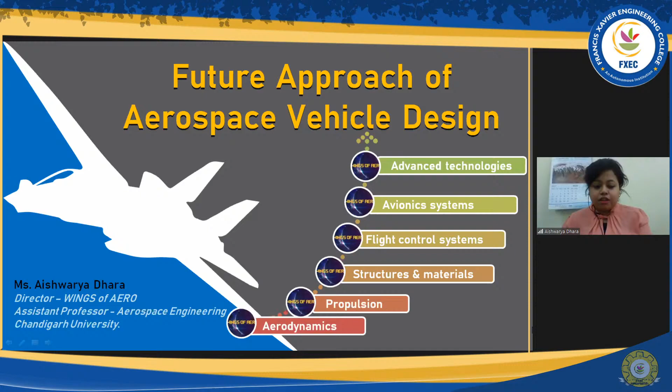Before we begin, you must know what is meant by an aerospace vehicle. It is a vehicle which has the capability to fly in air within the atmosphere and outside the atmosphere.

Aircraft can be classified into various types. First, lighter than air and heavier than air. Lighter than air includes kites, balloons, and airships. Heavier than air can be classified into two forms: with engine and without engine. Without engine, we have the glider or sailplane. With engine, it can be further classified as an airplane, rotary wing, or ornithopter.

The airplane is further classified as a land plane, which can land on land but not on water or other surfaces - this covers most fighter and passenger aircraft. An amphibian is a type of aircraft which can land either on water or on the ground. Then there's the seaplane, a special type of plane which can only land on water.

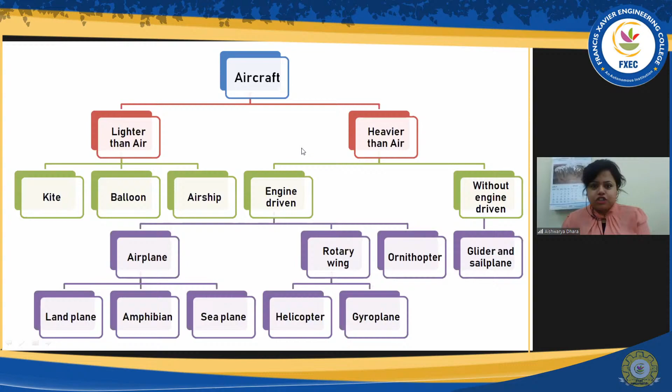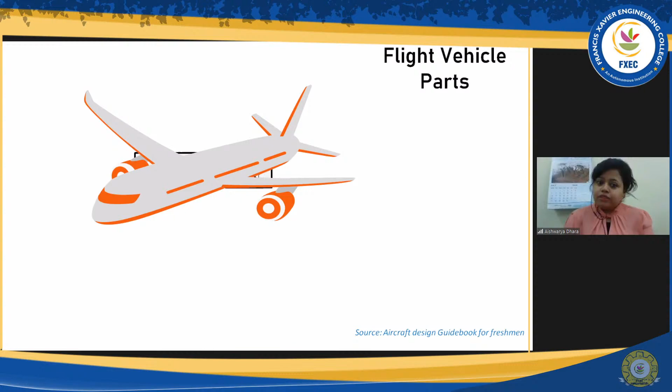Now we will see what are the flight vehicle parts. It's important, when we begin to design, to know the basic parts of an aircraft. Here is a sample aircraft in my hand. Basically, any aircraft has four basic units. First is the wing surface, which helps to produce lift.

Then comes the intake, meaning the engine. Here is the engine. What this engine does is help to propel the aircraft forward - this is the function of the engine, to produce thrust.

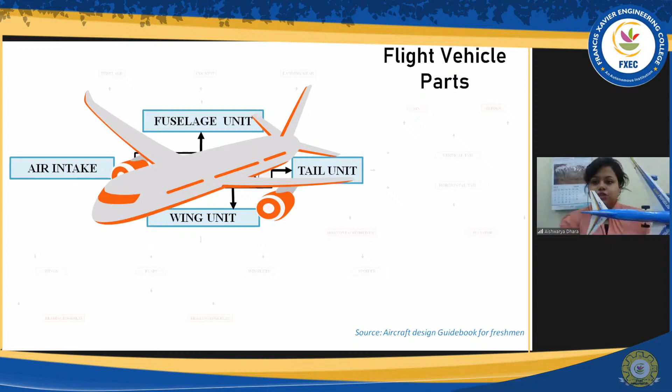Then the tail, which has two types: vertical tail and horizontal tail. This is the vertical tail, which has a control surface called the rudder. The horizontal tail also has a horizontal stabilizer and control surfaces. Using the control surface called the elevator, we can control the movements of the aircraft.

Then moving to the fuselage section - the entire body where the passengers are accommodated, where the luggage is stored, or in the case of military aircraft, where the missiles are loaded. So these are the basic units of any aircraft or space vehicle.

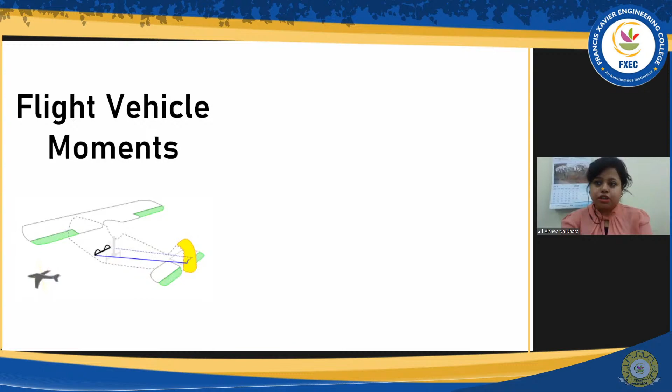Now it is important to know the basic flight movements. Until you know these, it is difficult to understand how aircraft design begins. Basically, any aircraft has three movements. First is roll, which is done by means of the aileron, located on the wing surface.

Here is a wing - we have the starboard and port wing, also called the right wing and left wing. In this wing we have the aileron. With the help of the aileron, when it deflects downward, high pressure is created which helps create high lift. On the other side, the aileron deflects upward, and due to this differential movement, it causes a rolling movement.

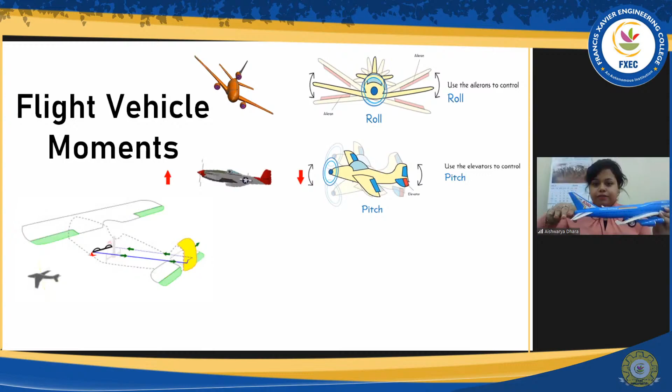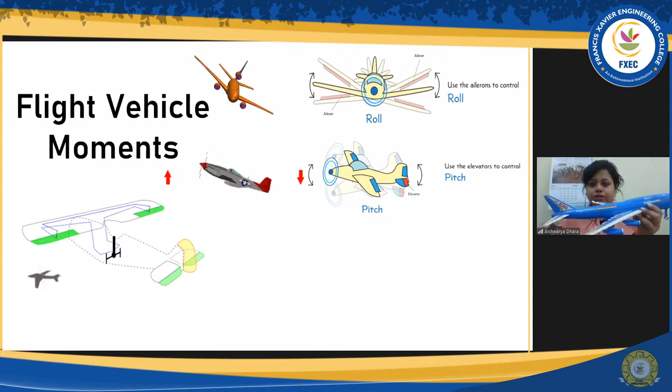Next we have the pitching movement, done by the elevator located on the horizontal tail plane. Using this tail plane, when both elevators deflect downward, the nose goes in the downward direction because lift is created there. This is how the pitching movement occurs - nose up and nose down - controlled by the elevator.

Then the last one is the yaw movement, done by the control surface called the rudder, located on the vertical stabilizer. It can move left and right.

So using the movement of this left and right direction, the nose can also move to the right and the left side, and vice versa. If the rudder is moved to the right, the nose will also move to the right. If the rudder is deflected to the left, the nose will also move to the left. So this left and right movement is called the yaw movement. So these are the basic movements of any flight: rolling, pitching and yaw.

Now we will come to today's phase, that is, what is the future of aerospace vehicle technologies now, and what will be beyond. Before that, you must know that for over 2,000 years, man wanted to fly and to move from one point to another. There have been stories of people strapping bird-like wing structures of stiffened cloth on themselves and attempting to fly from a tower. So this is how it was initially tried 2000 years back.

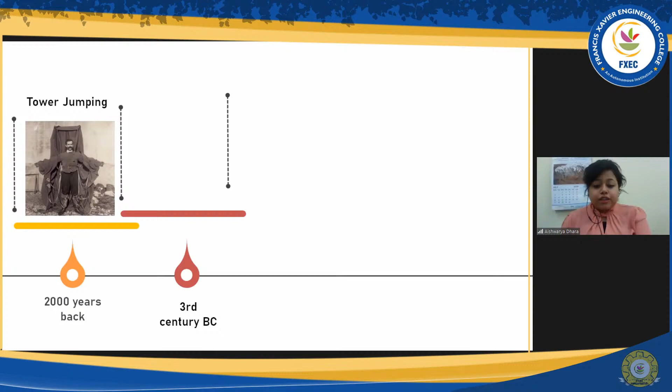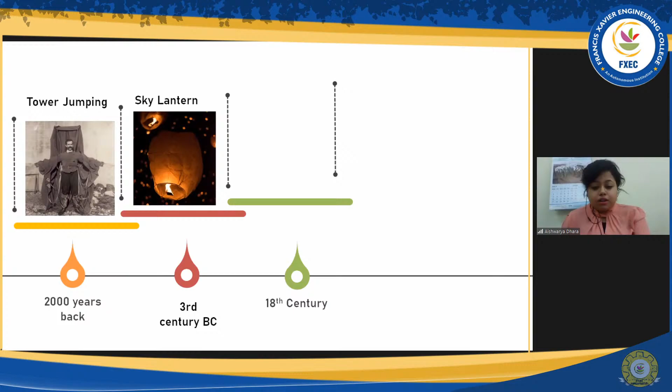Later, in some BCs, the sky lantern was developed, and the principle of the sky lantern is based on the hot air balloon. Once the air gets heated, its density becomes lighter, and as it becomes lighter, it lifts off. And back in the 3rd century, China and other people used the sky lantern to scare enemy troops. Gradually, in the 18th century, the balloon became a major rage in this evolution, and it also helped provide an understanding of the relationship between altitude and the atmosphere.

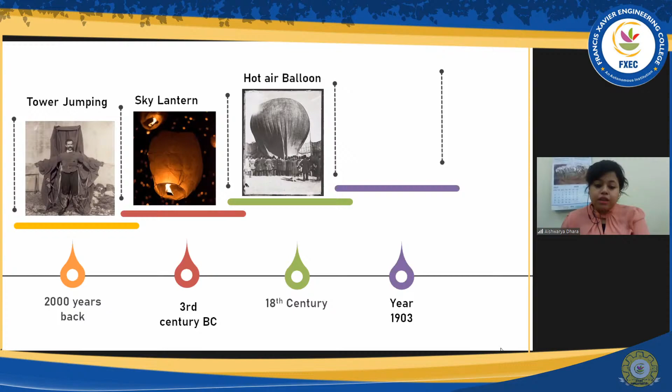Then, using the methodological approach of the controllability of the aircraft, the Wright brothers built power gliders in the year 1903. After that, over a period of time, it evolved to the cloth and wood biplane of the 1920s. As you can see in the figure, they made wing structures using wood with cloth mounted over it. Gradually this evolution kept developing, and in the 1930s the first all-metal single wing aircraft was developed.

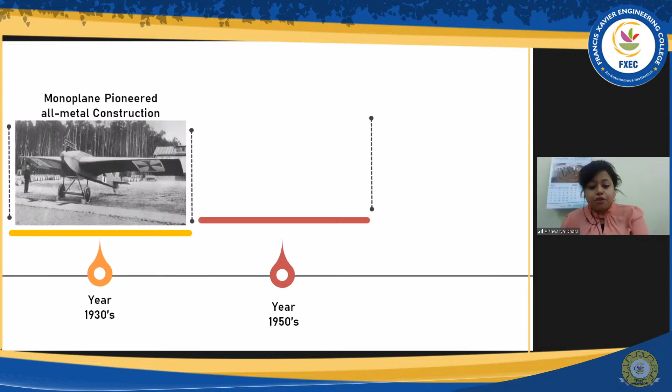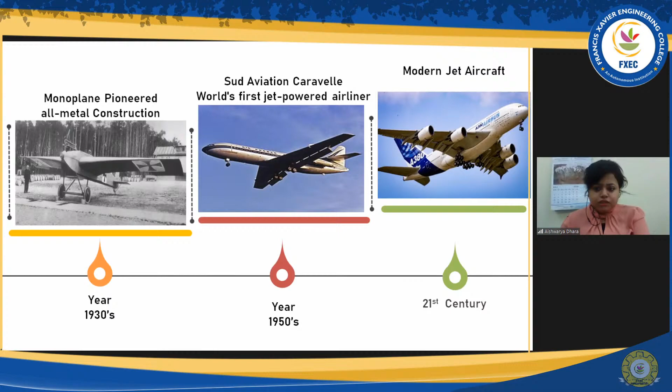From there it developed to 100-passenger transport aircraft in the 1950s, and gradually the modern jet aircraft. You can see the modern Airbus 380, a double decker, which has the capability to reach any point in the world in a single day. So this is how the aircraft of the 21st century may look, but fundamentally different further in the future.

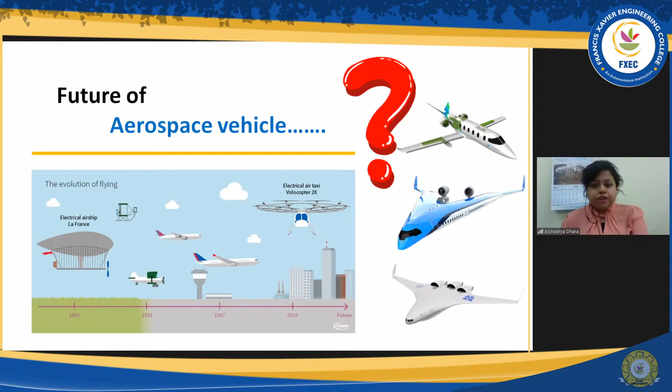All those inspirations began from watching birds. As you know, we all like to watch birds, and when we look at birds, we feel like flying in the air. So this whole concept is biomimicry, or we can say engineering in nature's style. Biomimicry is defined as the practice that learns from and mimics the strategies found in nature to solve human design challenges. Even NASA has been inspired, and they have developed the very next generation, not as a blueprint, but as a biomimetic mode.

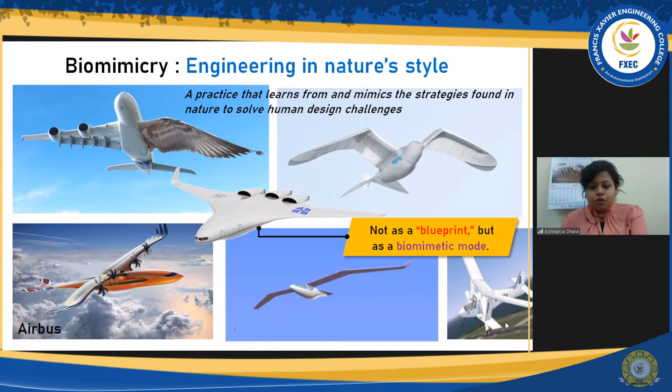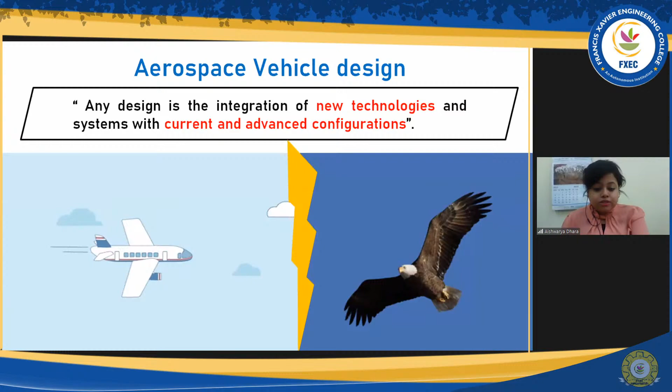As you can see, this is a blended wing body which looks similar to a bird. Even recently, news came from Airbus that they are developing a hybrid electric airliner, which aims to show the potential of biomimicry in aviation design. You can see the winglets; they look almost similar to the feathers of birds. So today our main concern is aerospace vehicle design, which states that any design is an integration of new technologies and systems with the current and advanced configuration.

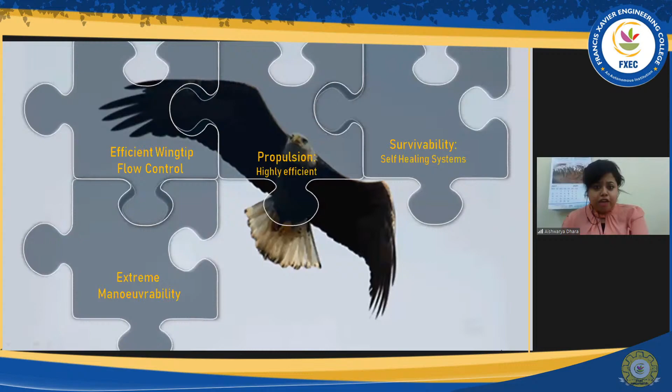Now consider our national bird. We all know our national bird is the eagle. The eagle is fully integrated with all the systems that are integrated in a real aircraft. As you can see: efficient wing tips, propulsion systems, survivability, extreme maneuvering, strong and lightweight, and even a morphing wing. The wing can be flexibly folded.

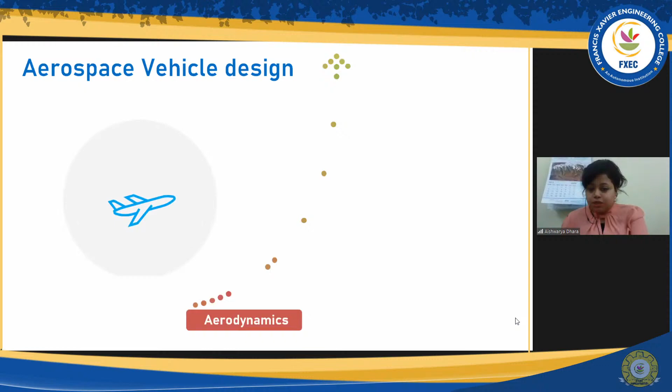So an aerospace vehicle must aim to meet all the requirements of flying within and outside the atmosphere, and must have all the following qualities. The first quality we need is aerodynamics. Next comes propulsion, then structures and materials, flight control, avionics systems, and of course we need to develop some advanced technologies.

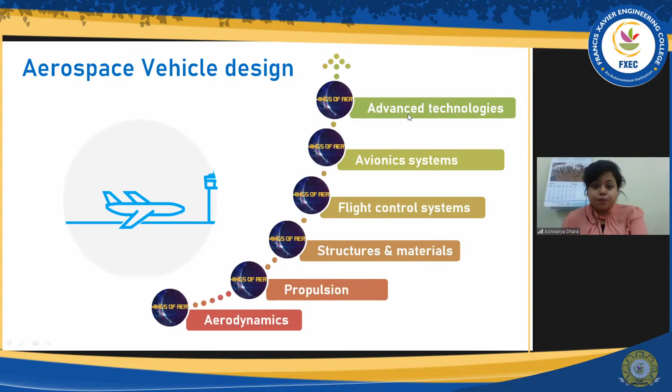Now we will look at each one, one by one, very deeply: how each change in aerodynamics, propulsion, structure and materials, flight control system, avionics systems, and including advanced technologies can improve the aerospace vehicle design. Now, before beginning any design, one must understand the following criteria, the following elements.

First, what is the customer requirement, or what is the present demand? That is very important to understand. Without understanding the demand, without understanding the present requirement, we cannot step forward to any design. After that, in aerodynamics, the important factor comes as size and aesthetic. Size means in aircraft we cannot make a very bulky thing. We must optimize the size and the shape, how it will look, maybe a design of a fuselage or the wing structure, engine locations, and many more. More detail will come in the upcoming slides.

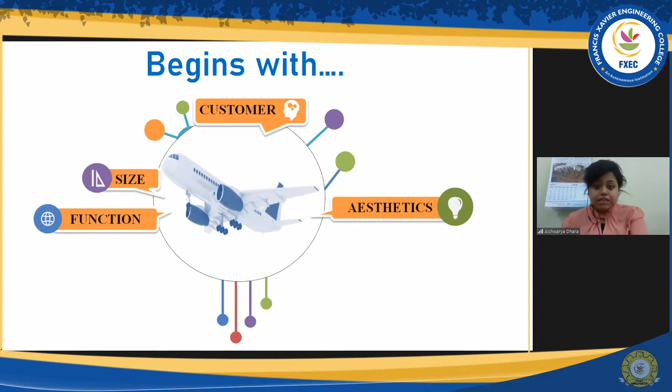Then comes the functionality. Whatever we are using, we must think about the function, whether it is useful to bring into the design, or we must avoid it, or what are the weight factors, because weight is one of the prime concerns in aerospace vehicle design. Then comes manufacture and safety. Manufacture and safety is another prime concern: we must see which methodology we are following to manufacture the aircraft, whether it is readily available in the market or not accessible in the market. So if I need to manufacture it separately, whether the cost will increase or not,

this is also one of the biggest concerns. So when we begin to design any aircraft, it is very important that one must know these qualities and justify them before beginning to design. First comes the requirement, and then the other qualities: size, aesthetic, function, manufacturing, safety. When we talk about the passengers, safety is another big concern. Then of course the cost. We must reduce the cost of the aircraft. So these are the factors. Now we will see how all these factors create a huge impact on the aerospace vehicle: aerodynamics, propulsion, structures, flight control systems, and advanced technologies.

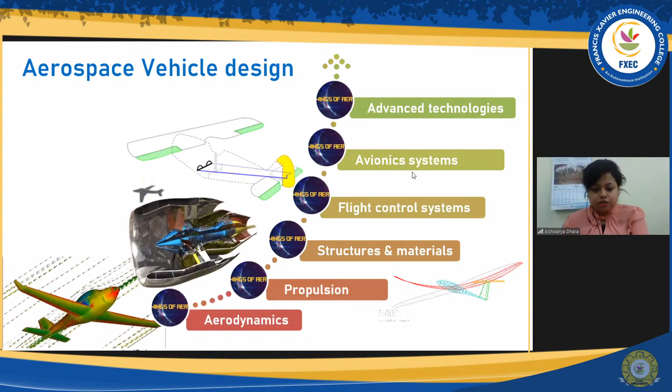First we will start with aerodynamics. What is aerodynamics? Aerodynamics is the study of flow over an aircraft. Here we want to reduce the drag of the aircraft, because by reducing the drag we attain better fuel economy. As you can see, when the flow moves over the bird, it causes a streamlined pattern. So we must remember, when we design an aircraft, it must have a streamlined pattern. That is one important factor.

The second factor is a smooth surface. By creating a smooth surface, we can avoid creating air resistance to the flow over the surface. So we must have a very smooth surface. These two are the main criteria. The streamlined pattern we can technically call an airfoil shape. As you can see in the bird, when we define the structure, it comes out as an airfoil shape.

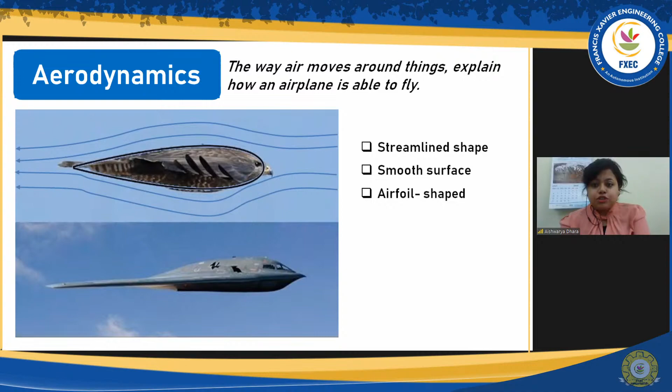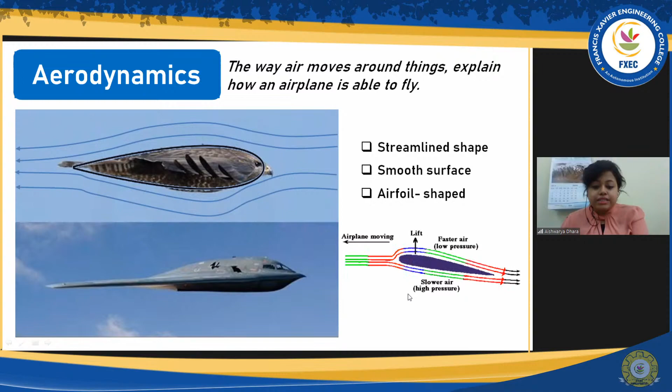As we increase the angle of attack of this airfoil, what happens? The bottom part of the airfoil creates high pressure, and on the top we have low pressure. To bring equilibrium, the flow tries to move from high pressure to low pressure, so naturally it pushes the object up. Due to this, it creates lift. This is how the concept of biomimicry has evolved to inspire the aircraft's wing structure. When birds want to take off or land, they raise their wing. The same concept has been used in the aircraft wing system.

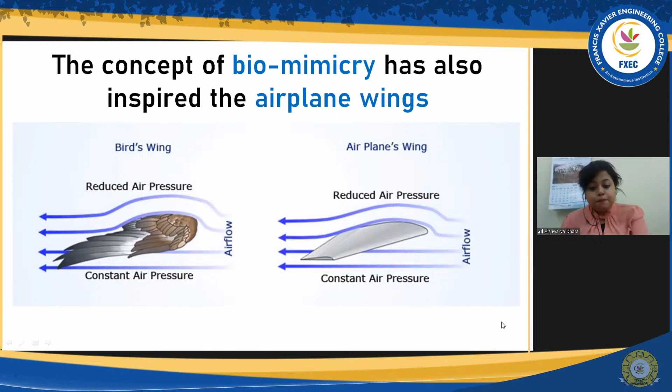Now, before you start designing the wing, you must know what the flight speed is. The flight speed can be defined in aeronautics by means of Mach number. Mach number is the speed of the object divided by the speed of sound. Here, the speed of the object means the speed of the flight vehicle, the aircraft, and the speed of sound is generally 340 meters per second. So this is how we define the Mach number.

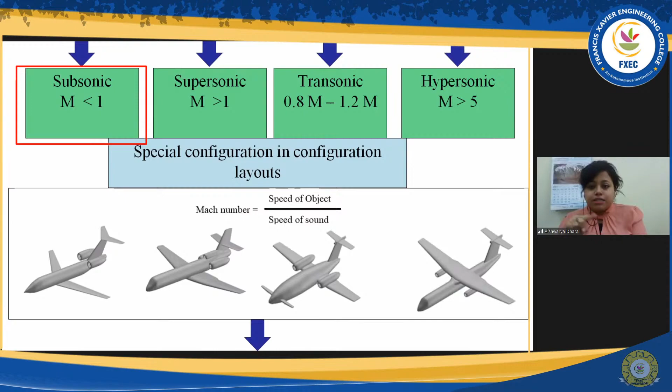So based on your aerodynamic performance and aerodynamic optimization, you must come to a conclusion which design will be beneficial, keeping in mind the shape, size, function, manufacturing, safety, and also the cost. All these constraints must be satisfied. This optimization can be further done. For example, there is much difference when you design subsonic and supersonic. What is the difference? Subsonic, the Mach number is less than 1; supersonic, it is greater than 1.

When the air is flowing over the subsonic aircraft, meaning the Mach number is less than 1, it is moving smoothly. But once we are designing any aircraft which flies at supersonic speed, we have a conical shape. Why a conical shape? Because if we use a blunt surface like this subsonic aircraft, it will create a bow shock wave.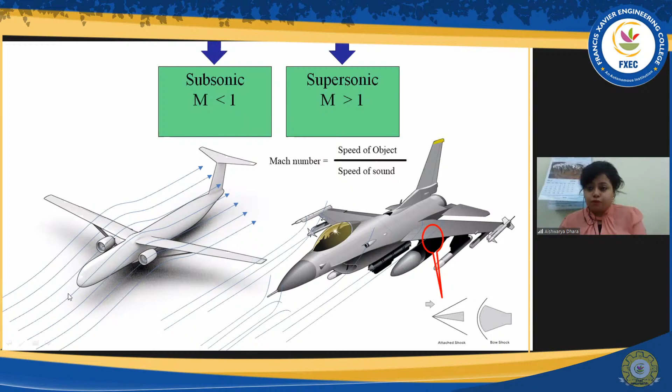So keeping all these constraints in mind, when we are designing for a supersonic aircraft or supersonic speed vehicles, we must have a sharp leading edge. And also when the flow moves along it, it creates an attached shock wave. So these are the constraints; we must clearly remember the concepts before we develop any aircraft.

Now moving to the next, we are having many different types. You can see the MiG is one of the fighter aircraft, which is also supersonic. You can see the sharp leading edge. This is a cargo aircraft which helps for transportation of large vehicles. You can see the configuration is different. This is a high wing configuration.

Then again, moving to the large passenger aircraft, that is a Boeing 787. You can see again their configurations vary, because each of these aircraft has different configurations, different requirements, different purposes, and also different speed ranges. So based on your speed range, the factors also change.

Then here is another amazing aircraft which NASA has tested, the Boeing 747, which has the capability to carry a space shuttle. So when this aircraft reaches an altitude of 15 kilometers, near the tropopause of the atmosphere, the space shuttle can take off from it, and due to that, a lot of fuel can be saved.

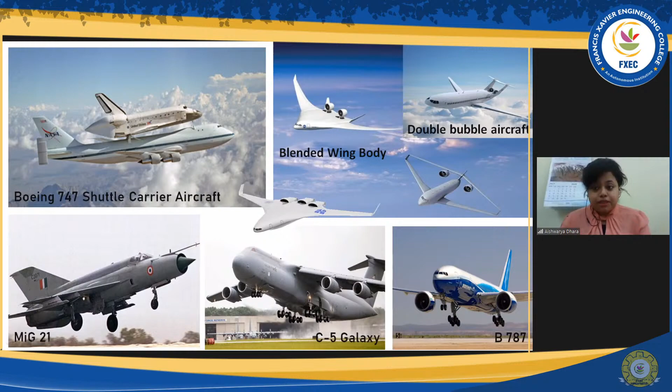So many things are happening, and there are some future vehicles upcoming. NASA and others have tested blended wing bodies, you can see. Then this is the double bubble. These are the upcoming generation. It has been said by NASA, in the upcoming predictions, that the upcoming generation will have such kinds of aircraft. This will be obsolete, and the blended body will see around 50 percent growth in the 2050s.

Now we will see how to do optimization. Before we go for the optimization, when you go for design, there are two ways. One is measures of effectiveness and one is measures of performance. When we talk about measures of effectiveness, we have to keep in mind the customer's point of view. And when we talk about measures of performance, we need to know the engineer's point of view. Now, how do these two factors vary?

Let's see. When we talk about the customer's point of view, you must know the amount of payload. Payload means the number of passengers traveling in the aircraft, how much weight it will be carrying, like for the cargo aircraft, or for missiles, what kind of fighter aircraft it will be and how many missiles it will carry. So all those factors are one constraint, the payload weight.

Then speed, as I've said, speed is one of the important criteria from the customer's or demand point of view. Then aesthetics, how the aircraft will look. Of course the look and appearance is one of the major concerns in the industry. Then technology, what advanced technologies will be applicable; this is the customer's point of view.

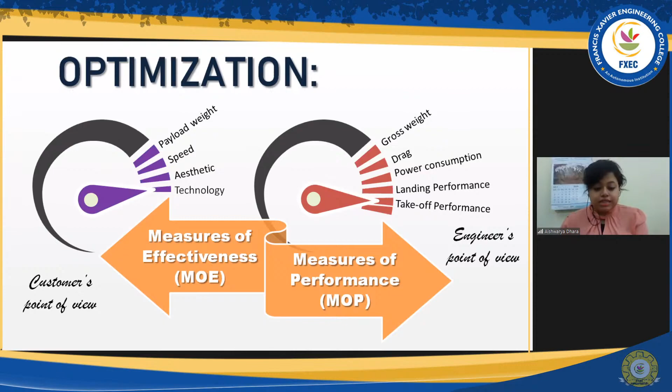So this is how you need to create an aerodynamic shaping, and aerodynamic shaping is one of the most important factors in designing any aircraft. Now many people keep asking whether the blended wing body will be the future. Yes, of course it will be the upcoming future. About 50% of aircraft will be of the blended body type. Now how? There is a wonderful story behind this blended body.

Do you know this blended body concept was started in the 1920s, developed by Nicolas Woyevodsky. The scientist Nicolas Woyevodsky developed and tested it, but finally, during the test, he had an accident, so that was gone. Then later, in the 1940s, another scientist from another industry, the Miles M.26, developed this project. But after testing and developing, they didn't find much difference in this design. So again, it became obsolete.

Then NASA took it over in the 1990s. Gradually they kept doing research, and they developed a small prototype unmanned air vehicle, the Boeing X-48, and the payload and everything was designed in such a way that around 450 to 800 passengers can be accommodated in that particular aircraft. You can imagine this is a very huge amount at a time. They also found that, compared with the conventional one, around 20 percent fuel savings are achieved. So this is a wonderful concept.

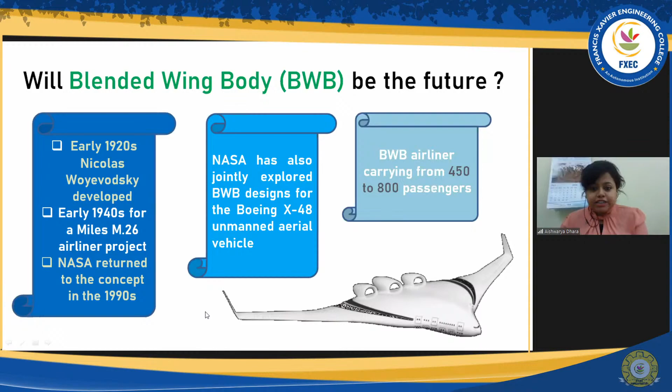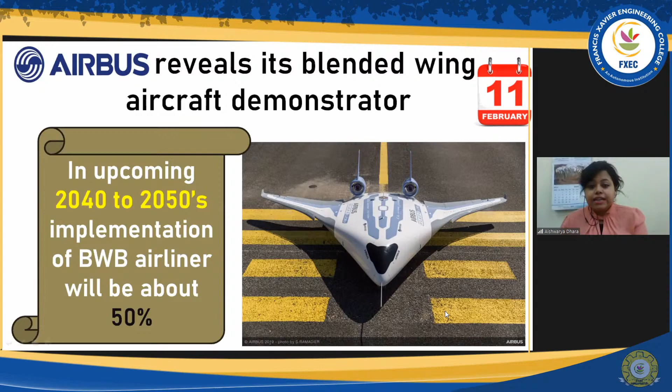As you can see, it is almost like a bird-like structure. And even recently the news came from Airbus on 11th February that they have fundamentally demonstrated this blended body concept, and they have also declared that in the upcoming 2040s to 2050s, blended wing body airliners will be implemented at about 50 percent. They have said that clearly.

Not only this blended body, there is a lot of research going on, such as the double bubble design, and also this V-shaped wing you can see. Then again, strut-braced wings are used, and the blended body. These are the upcoming futures of the aircraft.

Now, when an aircraft is flying at some altitude, it must undergo some kind of loading on the structure, such as air loading, inertial loading, loading due to the power plant, meaning the engine, loading due to landing, takeoff, taxiing, towing, jacking, or maybe even bird strike. So these are the loadings an aircraft can undergo. Based on that, it is very important for a designer to design the structure. So based on research, researchers modified the structural design of the aircraft for these applications.

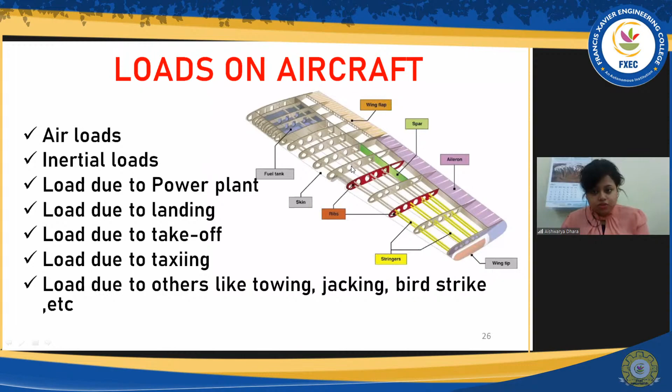So, as we know, when we talk about the structure of the aircraft, it consists of ribs. You can see the ribs, which give the defined shape of an airfoil in every section. Then we have the stringers, which attach longitudinally from the root to the tip. Then we have spars, mostly of I shape or T shape. You can see here, these are the spars. All those give the support and rigidity of the structure. Now these are the basic structures.

Now in advanced research, they have modified the structures based on the type of aircraft. When we talk about multi-rib wings, multi-rib means the number of ribs will be more compared with the stringers or the spars. Multi-ribs are mostly used for transport aircraft, like passenger aircraft and cargo aircraft. Multi-spar means there will be multiple spars from the root to the tip, where the number of ribs will be very less. This kind of structure is used for high speed aircraft and fighter aircraft.

The reason is that at high speeds they undergo shock waves, and a shock wave is nothing but high pressure acting on the surface or the material. So we must make the structure strong enough to resist such pressures. Then coming to the single spar wing. Single spar wings are mostly used for sailplanes or gliders. Single spar means there will be only one spar in the entire cross section of the ribs. Because this kind of sailplane doesn't undergo much load or much impact, it uses a single spar.

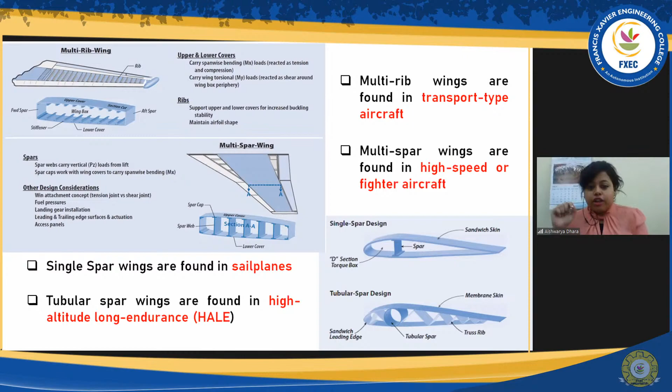An amazing design has been done as a tubular spar design. These tubular spar designs are used for high altitude long endurance aircraft. High altitude means it can go more than 15 kilometers from sea level into the atmosphere. Long endurance is a term we use in aviation, meaning how much time an aircraft is flying in the air. Long endurance means an aircraft can fly more than 24 hours, not less. So for such aircraft, we use this tubular spar design.

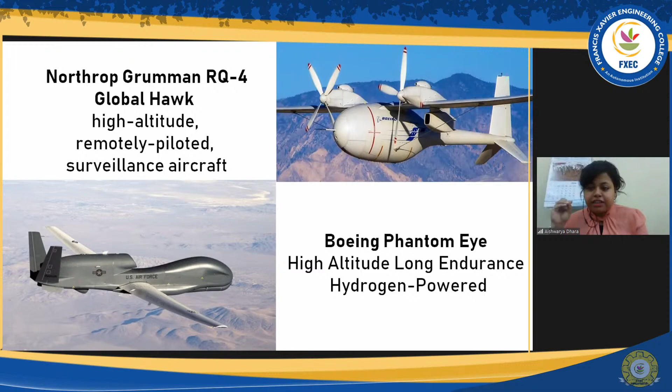So these are the types of high altitude long endurance aircraft. Mostly we use UAVs, the very commonly known Global Hawk and the Boeing Phantom Eye. These have wide applications for surveillance, and some are for predicting atmospheric properties and other factors.

Once we move out from these structures, another important thing human beings have aimed to discover is a new alteration of the design. This concept was developed by watching birds. When birds want to move faster, they flap their wings. The same principle has been implemented in planes, called wing morphing.

Most modern aircraft use a fixed wing, as shown in previous slides, meaning the angle cannot change. But with morphing wings, the aircraft can have multi-role capability and can sustain in the air longer, even during flight. Scientists have said that when a wing transforms, it is easy to steer in the air, and it will fly much easier than a fixed wing.

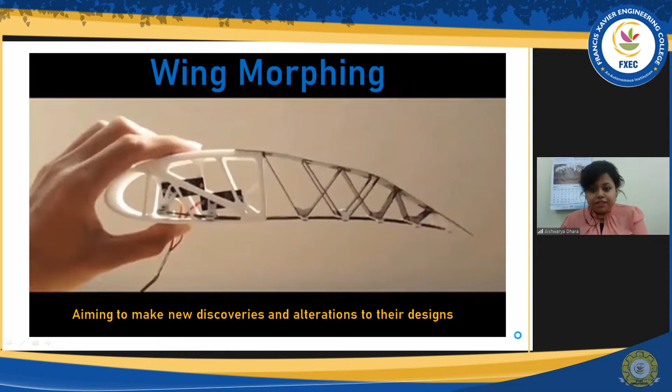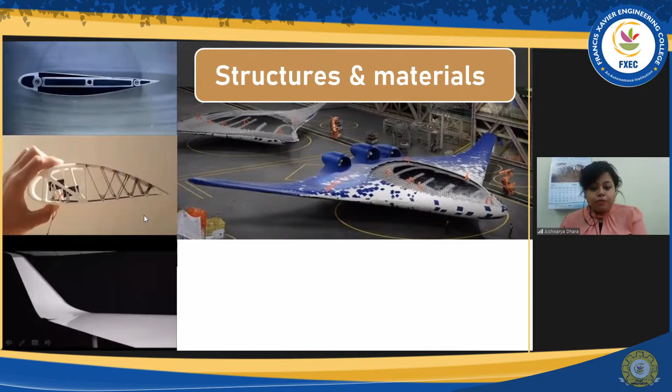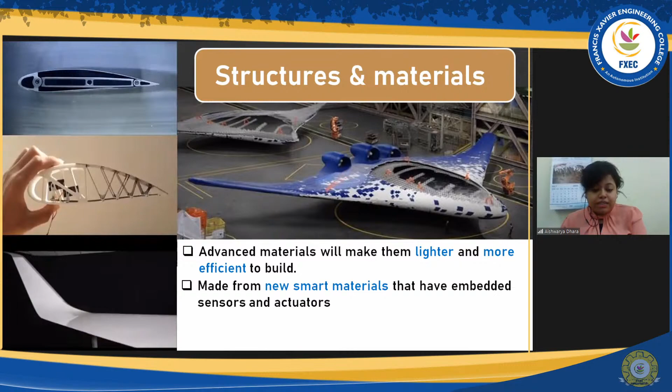There is a lot of research going on. Even NASA has been pursuing studies today, getting inspiration from biomimicry inspired aircraft. Using that, a lot of advanced materials are used which are lightweight and more efficient to build. Weight has been one of the prime concerns for decades, so aircraft builders and designers working on wings have the main concern to design something strong and stiffer. These structures almost look like bird-like structures, as they have imagined the bird and implemented it in the wing structure—this will be the future.

They are doing this by using new smart materials, embedded with sensors and actuators. These sensors and actuators measure the pressures over the entire surface of the wing, and the signals actuate how to respond, like a feedback mechanism. Tiny computational elements detect how the aircraft responds to the signals, and eventually they learn how to change the shape of the wing and optimize based on the flying conditions.

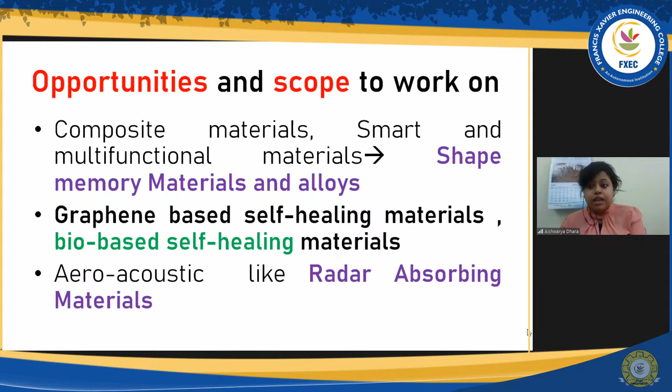So there is a wide variety of opportunities and scope to work on: composite materials, smart materials, multifunctional materials, shape memory alloys, graphene-based self-healing materials, and in the future bio-based self-healing materials, because fossil fuel resources will become extinct and oil prices will be high—the only option will be bio-based. Another wonderful area is studying the effects of metamaterials on aeroacoustics, like radar absorbing material, mostly used in fighter aircraft as stealth technology.

So this is all the growth of composite material. You can see in the Airbus 350 XWB, they have used around 53 percent composite. In the Boeing 787, they have used almost 50 percent, and in the near future they are planning to build aircraft with composite around 70 percent or even more.

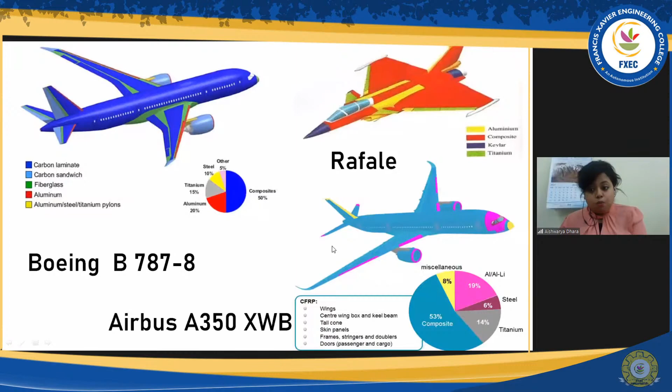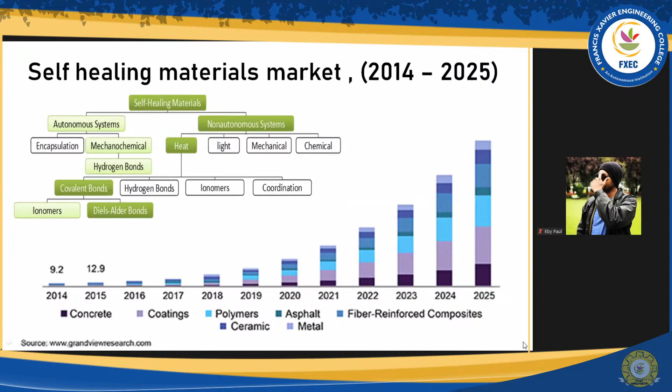Before, in the 20th century, they were studying fracture mechanics, how the fracture begins. But today, in the 21st era, they are studying how the self-healing mechanism is going to work, and more detailed, more awaiting technologies are going to come.

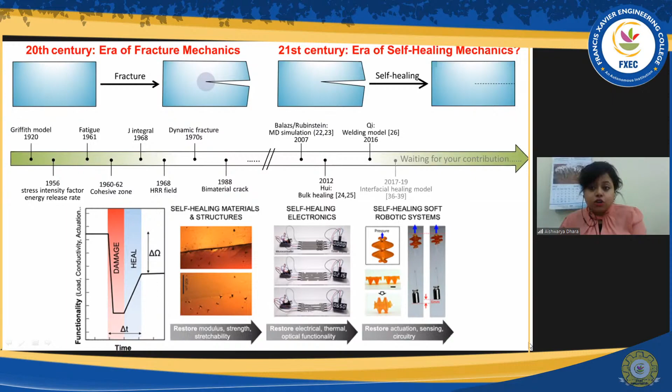Okay, now after that, this material structure is gone. Now after the wing, we will come to the propulsion, which allows the body to move forward. That means the engine needs to integrate the health management systems.

In an aerospace vehicle, the engine can be classified into two types: air breathing engine and non-air breathing engine. Air breathing means, by the name itself, the system will be within the atmosphere. Non-air breathing will be applicable outside the atmosphere.

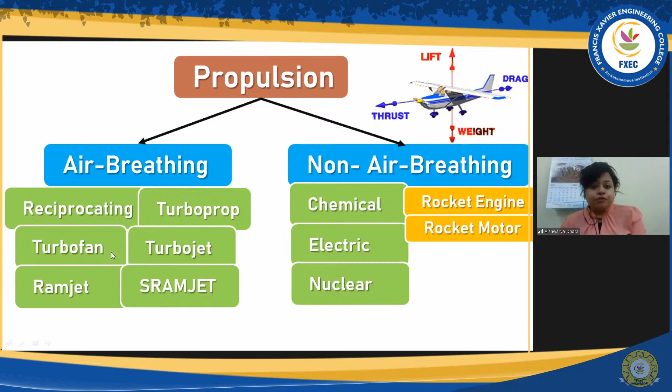When we talk about non-air breathing, that means it comes to rockets and such, which can be chemical, electrical, or nuclear for the future. But air breathing has been classified as a reciprocating engine, which we know as a piston engine, then turboprop, turbofan, turbojet, ramjet, scramjet. Now, the applications of these engines need to be considered based on speed.

By directly or indirectly, it comes to the speed. We always mention speed in aeronautics by means of Mach number, which defines the ratio between the speed of the flight and the speed of sound. As you can see in this chart, when we talk of the reciprocating piston engine...

The flight speed should be Mach 0.3 or less than that. Beyond that, the aircraft performance won't be successful. As we gradually increase, let's move to the turboprop. Turboprop is almost Mach 0.5, and at Mach 0.5 only it will give the maximum efficiency.

Now gradually moving to the turbofan, which can be of high bypass ratio or low bypass ratio. As we increase and go nearing to transonic speed, that is 0.8 Mach, we use this turbofan.

Beyond that, when we start using fighter aircraft beyond Mach 2, we use a turbojet. As we increase the speed further, afterburners are implemented. Ramjet does not start from zero because it needs an external device to accelerate it. Similarly, the scramjet needs an additional device to boost up its performance. Then comes the rocket, which can reach more than Mach 6.

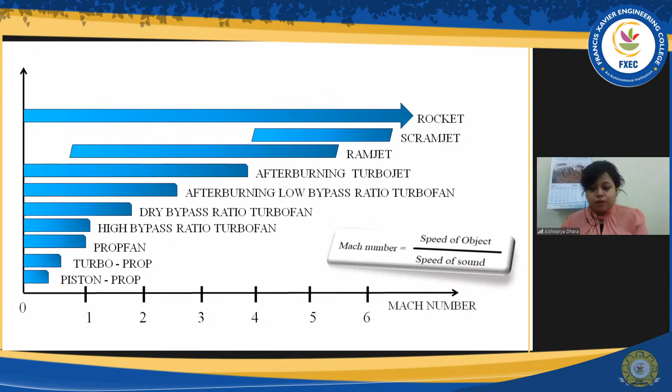So this is what we consider first when we design. You must have a sound idea about the speed criteria and all. Now we will look into some of the principles of this turbojet.

So what are the basic parts of a turbojet? Because most aircraft use this gas turbine engine, and these are the basic components of a gas turbine engine: the inlet, compressor, combustion chamber, turbine, and nozzle.

So what happens from here? The air gets sucked in, and it moves to the compressor. As it moves inside the compressor, the air gets compressed, the pressure builds up and increases, and this pressurized air moves to the combustion chamber.

As it gradually moves to the combustion chamber, similarly like in the piston engine, fuel injection takes place through a fuel injector. The compressed air and fuel get mixed up, and that hot gas moves and expels out from the turbine and gradually from the nozzle. This nozzle helps create very high kinetic energy, which forms thrust and helps the aircraft propel forward.

But what happens is, when this exhaust gas expels out, in most cases there are a lot of unburnt gases, and due to these unburnt gases, it causes pollution in the environment.

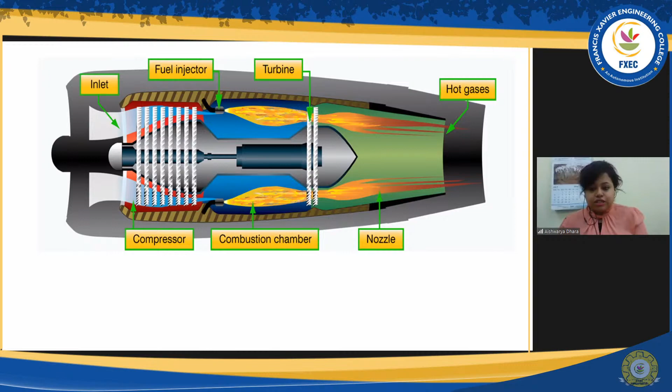Now again it comes to the point of research, how to improve engine efficiency. Once we increase the engine's efficiency, we can better consume the fuel, leading to better mixing of compressed air and fuel in the combustion chamber. So there are many ways we can reduce pollution or take care of the environment. These are the futures.

They're looking at renewable energy sources as another way to reduce carbon dioxide emissions, by means of alternative fuel use in gas turbines, electric propulsion, or hybrid propulsion systems. These are the categories we can look into for aircraft design, by changing the fuel system - either completely electrical propulsion run by batteries, electrical motors, or superconducting devices, or hybrid, meaning both electric and aviation fuel. So by that we can balance the environment.

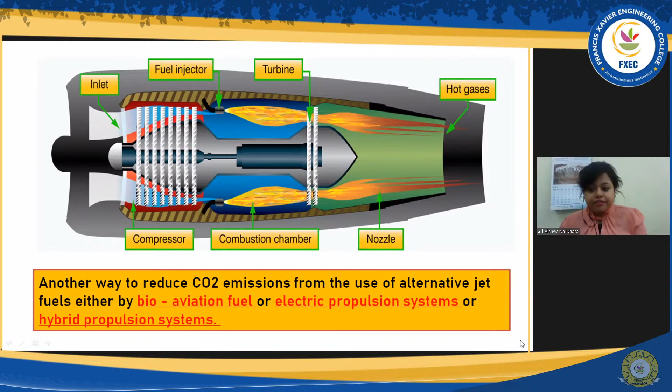There is a lot of research going on. You can see the hybrid electrical flight, starting with the Cri-Cri. This aircraft was developed as a turboprop aircraft before, around 1997, by Michael Colomban in France. Later he changed that turboprop engine into an electrical engine, and successfully flew it in 2010. That is the Cri-Cri, the first development of hybrid electrical flight.

Then gradually it increased, and Airbus also started with hybrid electrical propulsion, E-Fan 1.0. With further developments, today in 2020 E-Fan X has been developed, and they say E-Fan X is a disruptive technology - a very unique thing.

What is meant by disruptive technology? It is a kind of technology which displaces the established technology - meaning it is in development and will bring a revolution in the industry, cannot be replaced by anyone else, and will be superior to any other technology. That is what's meant by disruptive technology, and that will be the upcoming vision of the 2050s - that is what E-Fan X has developed, and achieving these goals is really a very challenging task.

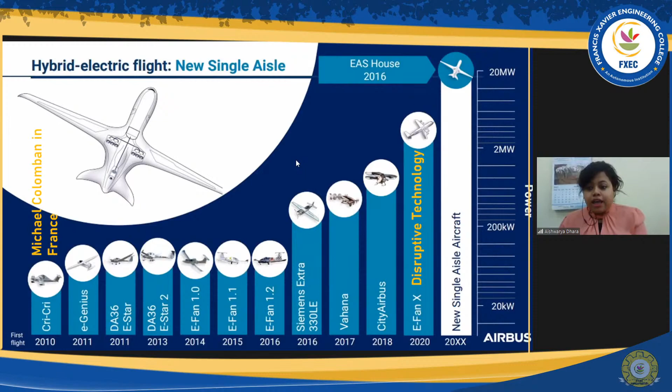I would like to show you one more startup company from Washington, Zunum Aero - the name derived from hummingbird. They developed this aircraft between 2013 and 2018. Their main concern was a 50-seater passenger aircraft, driven completely by electrical power, maybe hybrid electrical power. So this is what the future will look like - all those we are currently using will become obsolete.

As you can see here, superconducting motor drives fans are being used in the nacelle to drive it forward. In addition, this electric power is also used to drive the internal systems of the aircraft, and so on.

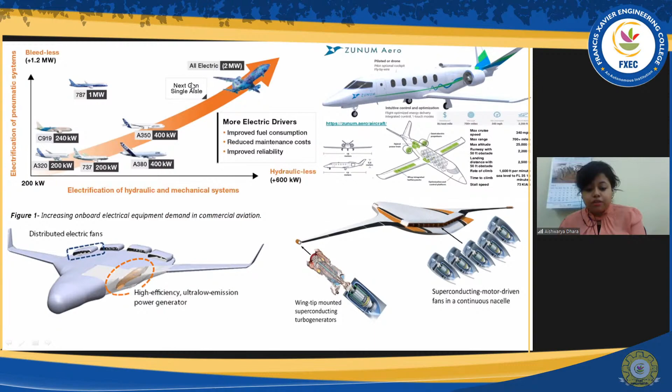This is the strategy - I can show what electrical power designs and what amount of power has been developed. Zunum has designed around two aircraft - one is 4 to 5 megawatt, another is 15 megawatt, both having the capacity of 50 seaters. We expect around 80 percent carbon benefits, not at present, but expected to reduce carbon footprints by about 80 percent from that particular design, maybe by 2035.

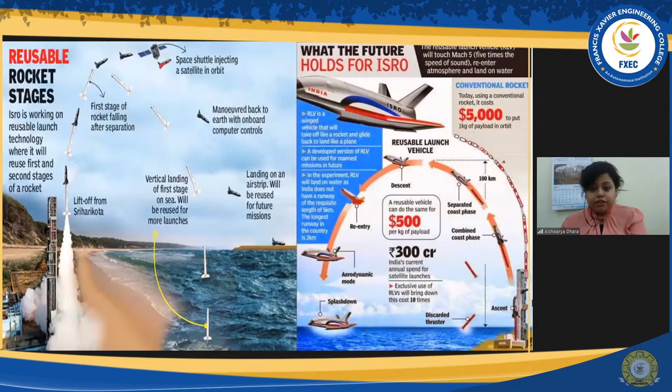So that's that. Now coming to talk about the aerospace vehicle outside the atmosphere - outside the atmosphere we cannot use air breathing engines. We need to use aerospace vehicles like rockets and so on. Recently all of you may have seen the launch of SpaceX's Crew Dragon mission.

Then in addition, sooner or later electrical propulsion will take up. This research is still going on, and about microgravity. Yes, the concept of microgravity, where NASA is experimentally also working on the staging of electrical propulsion systems for interplanetary systems. Everything is still under research. And again, nuclear and electrical propulsion space systems are being considered for longer missions in the future. So this is also one of the things.

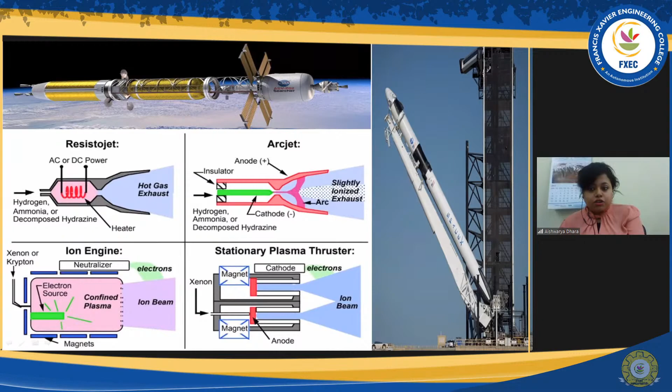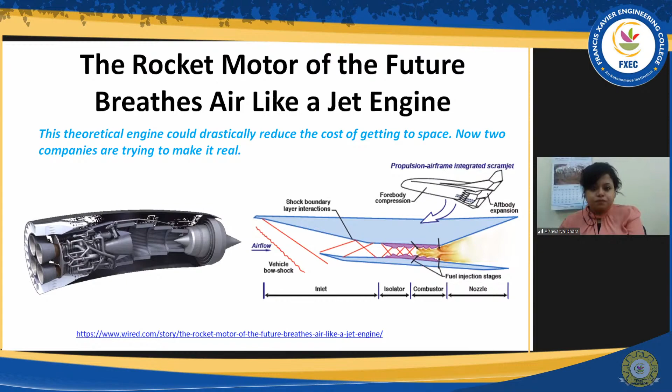So these are the upcoming things, and a few more new engine architectures have been done. This has been done by Rolls-Royce. Presently work is going on the Advance and UltraFan engines. Rolls-Royce is expecting that fuel burn and CO2 emissions will be reduced by 20 percent compared with another Rolls-Royce model, the Trent 800. So they are comparing with the present model, the Trent 800, and have found there will be a 20 percent reduction in fuel burn and emissions.

Then Safran is also developing another design. Yes, one minute. Another design, which is the ultra high bypass ratio. Safran is designing it, and they have shown that emissions will be at least 25 percent less compared with the Rolls-Royce Trent 800 engine.

So huge work is going on. This Safran ultra high bypass ratio engine has a bypass ratio above 15, and they have designed a very unique design using lightweight composite material, and in addition it can help improve fuel efficiency by 5 to 10 percent. They have found this kind of engine can be installed in the Airbus A320neo family, which comes under the narrow body category.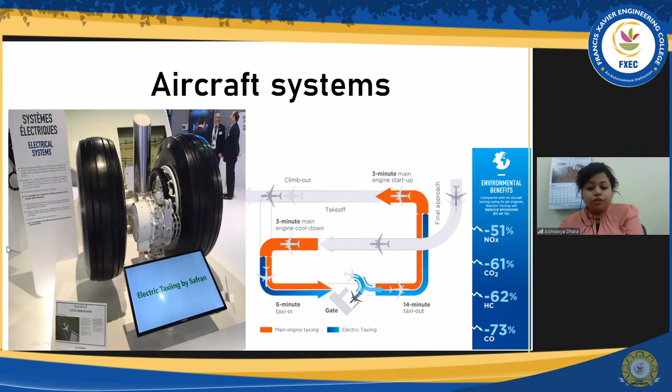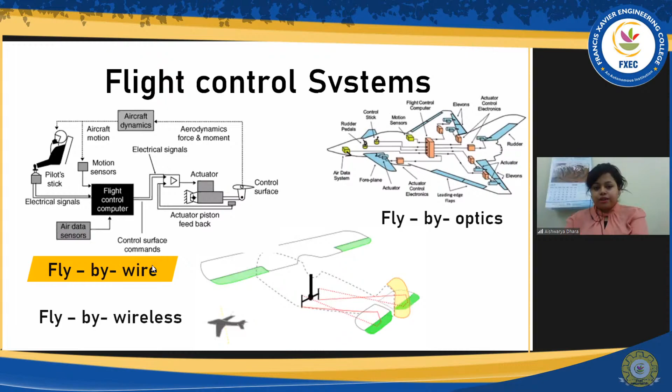Now the mechanical system has been converted to the fly-by-wire system. Mechanical has been replaced by the wire mechanism, because they found that by using wires they can reduce the weight of the aircraft. Now gradually, from the wire system it has moved to fly-by-optics. Compared with the wire system, when they go for the optical fibers, they found again a huge change in the gross weight or total weight of the aircraft. So weight is a prime concern, as I've said.

So a small change in the control system can affect the performance of the aircraft. So fly-by-wire has been converted into fly-by-optics using optical fibers. They have used a redundancy process: if one fiber fails, another will take over. So there will be many data bus avionics systems in it.

Now in the upcoming future they have been working on, and a patent has already arrived for, fly-by-wireless. There won't be any linkage or connections; all will be done wirelessly. So using this wireless system, there's a huge reduction in the weight of the aircraft. And once the weight of the aircraft gets lower, the efficiency or performance of the aircraft will automatically boost up.

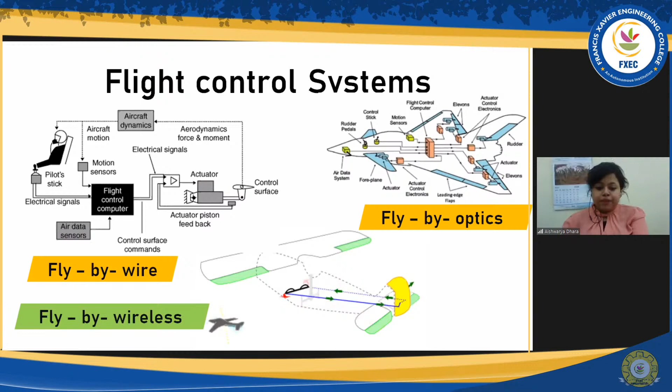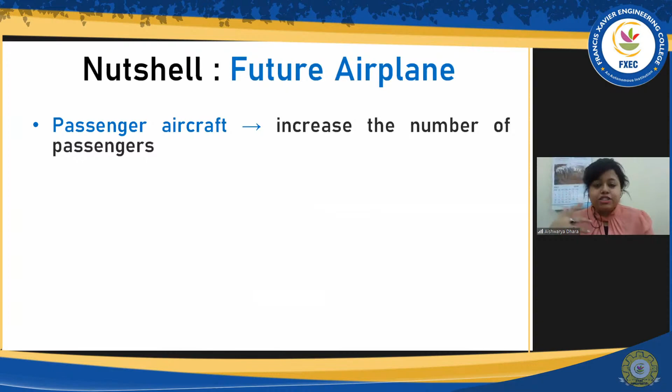So in a nutshell, this is very important before we develop a future airplane. When we design a passenger aircraft in the future, we must increase the number of passengers at a time, so with the same investment we can travel more distance and economically save fuel. For cargo aircraft, we must have efficient transportation at maximum endurance. So this is the future.

Air taxis and air mobility transportation, where, as I've said, AI will play a major role, with flexible movement from one place to another. And then electric planes: as I've said, by the 2040s around 100% of airplanes will be electric planes, because this focuses more on environmental issues, because we have to save the environment.

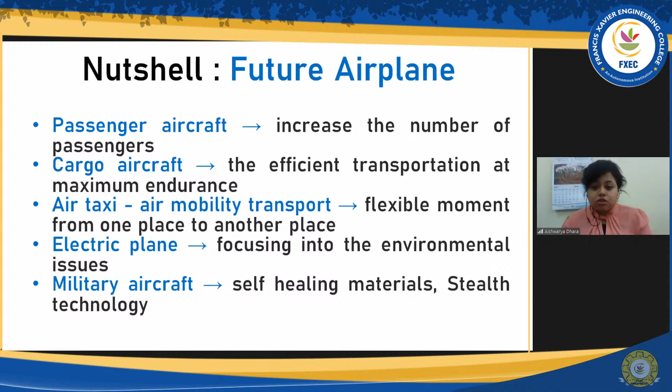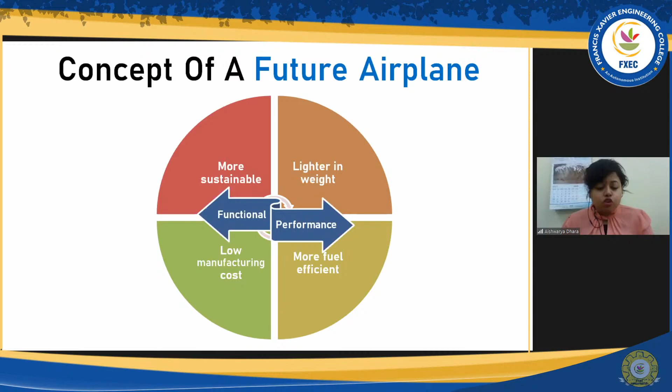Then military aircraft are going to use technologies like self-healing materials, stealth technology, and so on. So in a nutshell, the concept of the future will be balancing the functional and the performance, which will be constrained by being more sustainable, lightweight, fuel efficient, and low manufacturing cost. All those four parameters will work hand in hand with the functional and performance category, because eco-friendly aircraft is a prime concern in the upcoming future.

Compared to today's aircraft, all the revolutionary aircraft concepts being developed play quite a considerable impact on various aspects of operation. So this is the growth from 2020 to the 2050s. Now I will show you the evolutionary technologies between 2020 and the 2050s. As I've shown,

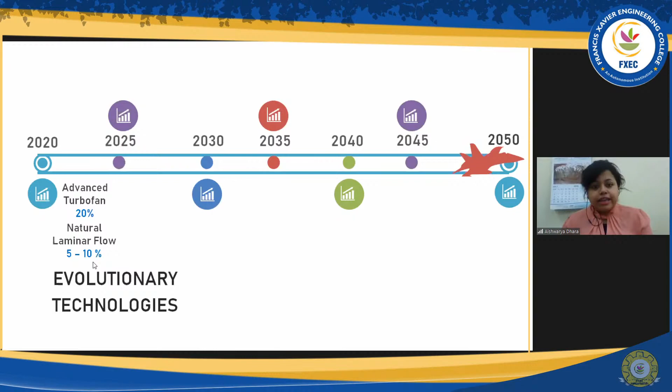Rolls-Royce and Safran have been developing the advanced turbofan. The growth of this turbofan will be around 20 percent implementation. Then laminar flow over a surface is another important concern, because if drag is produced, the fuel consumption will be more, which we don't want.

And then within 2025 to 2030, we will have the wireless flight system, where the implementation will be less because it will take time to develop; growth will be around 1 to 3 percent. But the UltraFan which Safran and Rolls-Royce are making will have high growth of 25 percent within the 2030s, within the upcoming 10 years.

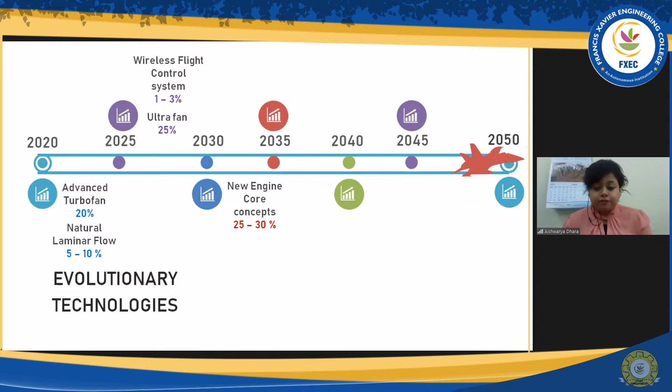Then within the next few years, we can see the new concept engine. Open rotor types will also be developed, and NASA has already tested them, and more experimental work is still going on. Soon they will implement a new engine core concept, and as we have seen, superconductive engines can also be implemented in the upcoming 2035s. These come under evolutionary technologies.

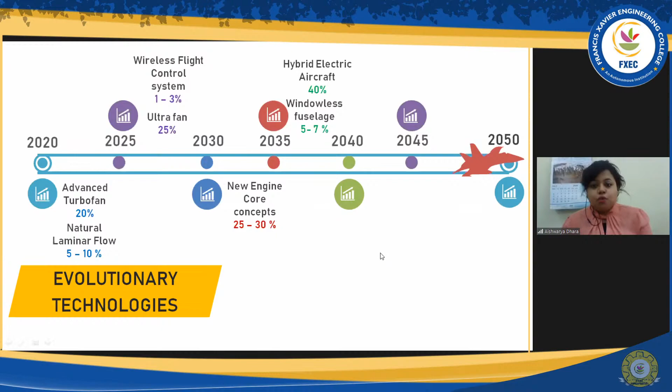After the 2030s and beyond, all the technologies will be implemented, or we can say revolutionary technologies. Before it was evolutionary, and after this it will be revolutionary. All the technologies will be applied and will see a very huge hike. As you can see, for hybrid electric aircraft between 2035 and 2040, 40% growth can be seen. And in the upcoming 2045s, 100 percent fully electric aircraft will be visible.

In addition, the morphing wing: research is still going on for the morphing wing, but the revolutionary implementation will act from this year on. And beyond that, as I've mentioned, the blended wing aircraft. Around 50% implementation will be done between these years, and double bubble aircraft will also grow rapidly, around 30 percent. So this is all about our future.

These are the growths. There are a lot of opportunities we can work on, and a lot of challenges for the blended wing design, because a blended wing body can accommodate a large number of passengers. At the same time, it has very low fuel burn, and the noise produced in the environment is very low. And as you can see, the cargo facilities are there, huge cargo volumes.

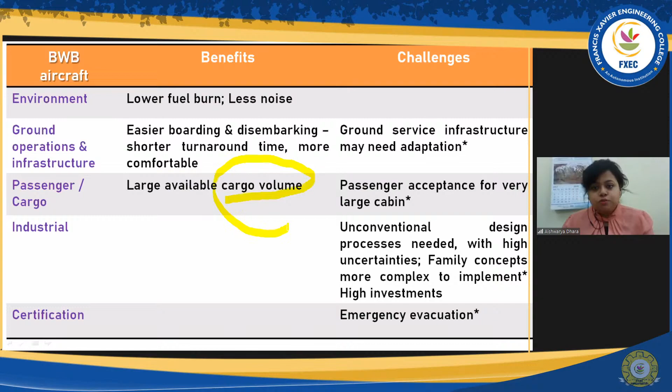So obviously higher volume means passenger capacity will be high, but rules and regulations are another concern; acceptance has not come from the FAA regulations. Another thing: if blended body systems are implemented, the ground service infrastructure needs to be adapted, because the mooring process and jacking process need to be changed accordingly. From the industrial point of view,

it creates a huge amount of investment. And one of the most challenging things I would like to highlight here is emergency evacuation, because the design of the blended wing is quite different from the conventional one. In a conventional aircraft, looking at the aisle width, everybody has a window on one side, but it is not the same case in the blended wing body. So we need to look into evacuation, and there are a lot of challenging factors, because safety is one of the prime concerns while designing any aircraft.

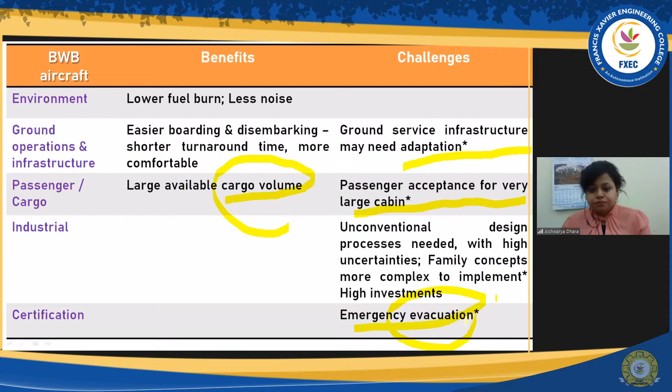So these are the things that need to be looked at in the future. Then moving to the next, another thing is the electrical aircraft. Electrical aircraft, we can see that it is energy efficient, low noise, of course. It is much more efficient. Of course, it will be starting with a low-scale industry, but the challenging thing is how they are going to store the battery, how long a distance it can travel, where it will be, how the installation will be done in these airports and all. So this is again one of the challenging factors.

Then, as I've said, the battery energy, power capacity, performance will be critical, because it cannot endure the aircraft for a longer time, like the Airbus or Boeing traveling for 15 hours. So if the same thing has to be implemented in an electrical aircraft, the size of the aircraft will go high, the weight of the aircraft will go high, then again it will be a critical point. So again, this is one of the challenges, a huge challenge.

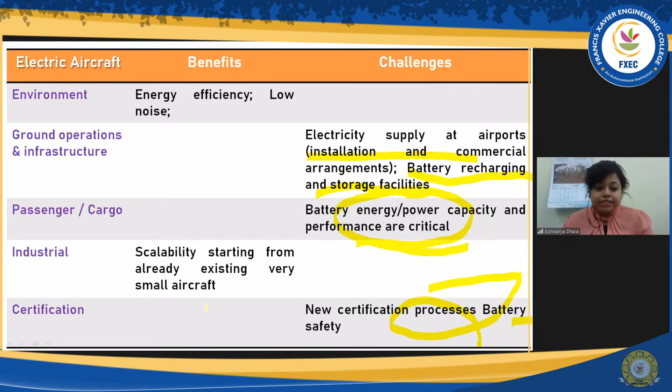And then again, certification of battery safety, whether the battery can sometimes explode. So again, it is one of the safety concerns, a prime safety concern, you can say. Right. So all those challenges are there. Maybe sooner or later, the researchers and the scientists will come up with wonderful ideas and technology, and many more technologies are on the way in the upcoming years.